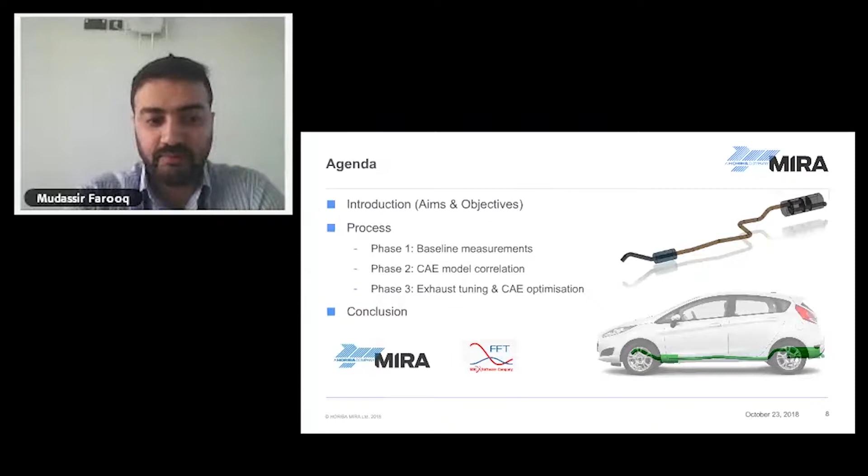Now I'm going to move on to the actual bit of the project that we did. So what is included in the presentation today? I'll go through the introduction, what aims and objectives we set for ourselves in the beginning of this project, how we broke it down into different phases. We've got 3 phases to go through, and then a conclusion at the end. Before I begin, this project was done in partnership with FFT, which is a subsidiary of MSC Software. They help us with the CAE side of things through their software, FFT Actran.

So, the aim. It was quite clear to us that we wanted to increase our vehicle development capability by conducting the sound quality development of the exhaust system at a CAE stage quite early on through subjectively developing it in the NVH simulator. A lot of the time we've seen in the past that development work happens at CAE stage where we cannot hear what the system sounds like. We do not have a subjective appreciation of the objective data. So this was the missing link, and this was the gap we were trying to fill. So we set ourselves some objectives.

So to name them, firstly, we needed to develop a procedure for ourselves for accurately measuring the source characteristics. So this means that for an exhaust system, the source will be the engine. So we had to identify the engine to capture its effects. The second step was to create a process for conducting a CAE analysis of the exhaust system. This is trying to identify the metrics to define an exhaust system in a CAE model.

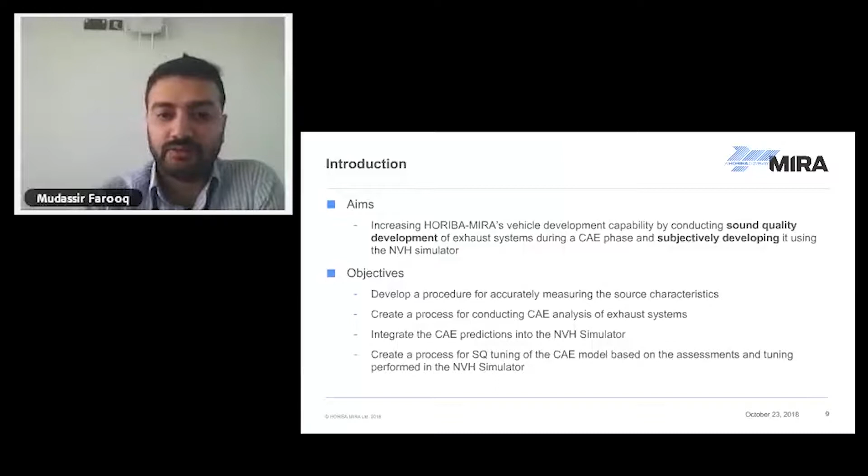Thirdly, to integrate that into our NVH simulator. I'll come to the NVH simulator a bit in detail later on. And then finally, to create a process for sound quality tuning of the exhaust CAE model through the simulator. So I'll go through each one of these in detail. Next slide.

Before I begin, I'll go through some of the theory. I wasn't sure on the audience that might get over here, so I'm going to go through the NVH theory over here a little bit. So what we have in all its simplicity is an engine that's producing some noise, which is connected to an exhaust system, and that is radiating noise into the atmosphere.

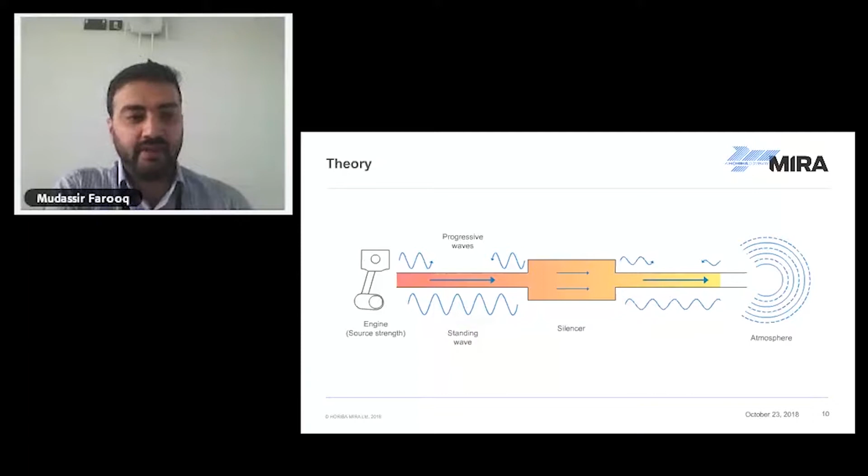So what we will get is forward traveling waves, so incident waves, and then they will bounce back because of the geometry and the impedance of the air, and then you will have reflected waves. As a result of these two, you'll get a standing wave, and this is what we are solving for in an exhaust system.

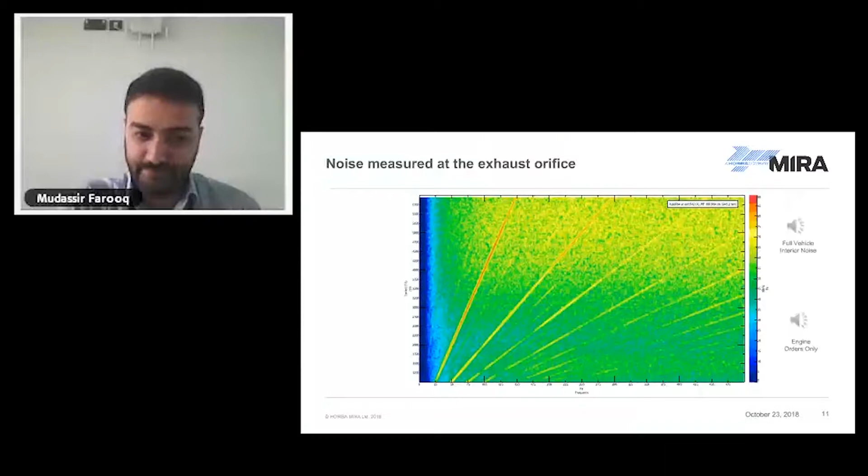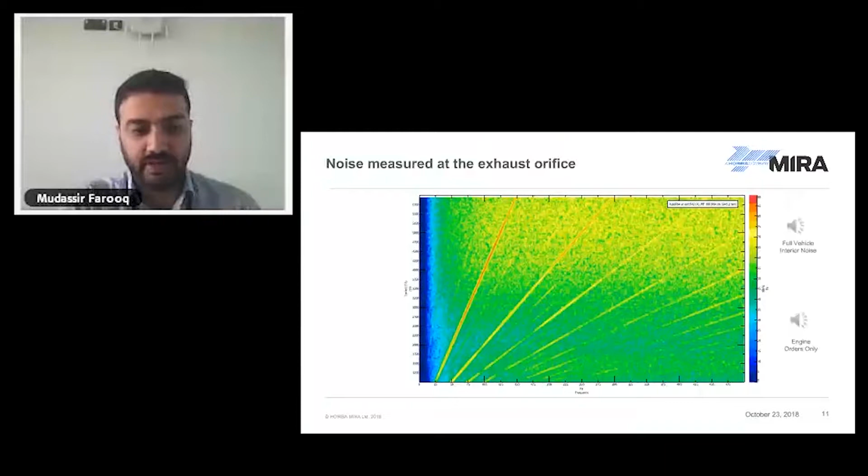As an example, I'm going to play back noise for full vehicle interior noise. So this includes road noise, wind noise, powertrain noise, and so that was a vehicle revving through the RPM range all the way from idle to max RPM, and you could hear the engine, you could hear the wind noise picking up towards the end, and you could hear the road noise. Now, if I was to filter out the powertrain noise, so these diagonal lines, it will sound like this.

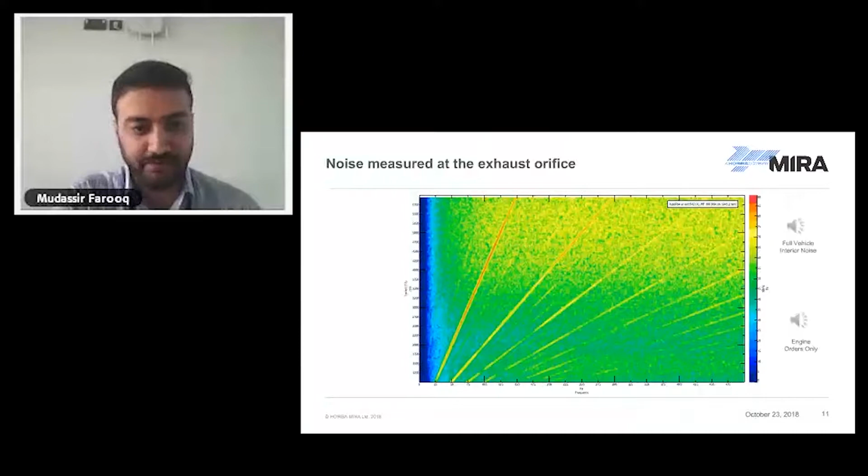So it's very tonal, very clear, distinct noise that you hear. So it gets rid of all the high frequency noise, the hushing noise from the wind and the road, rumble noise. So pure tones essentially. So that's what we're trying to tune over here, these orders. So moving on from there,

the noise simulator. So the noise simulator essentially is, we take some recordings on the track to create a model in this noise simulator, and then you can have a virtual model in a facility somewhere that you can replicate the load conditions, and it will reproduce the noise that we recorded. It's quite beneficial for target setting, for noise tuning, for development exercises, and for troubleshooting as well.

So what will happen in a hybrid vehicle, you'll start off, the engine is switched off, you will roll under the battery power, so you'll go up to 20 or 30 kph, and then the engine will kick in, but rather than accelerating, the engine might stay at a constant speed. So the subjective assessment of such a behavior, you can do it quite easily and clearly through a noise simulator. And that's one of the benefits of using a noise simulator.

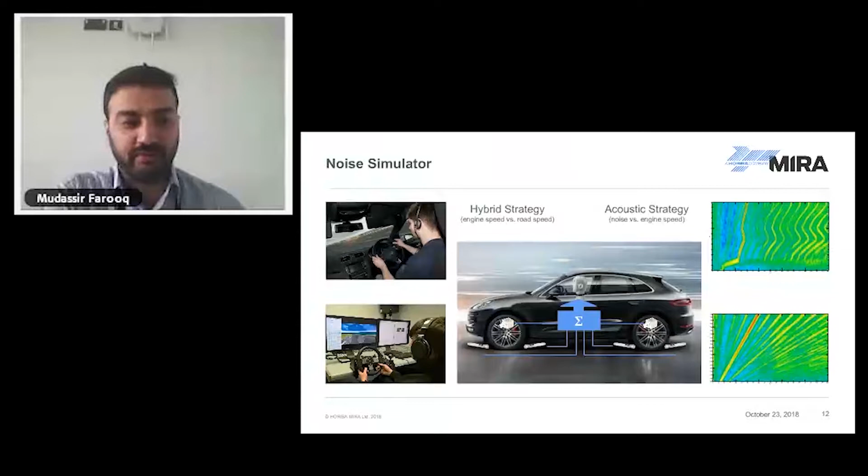In our instance, what we've used the noise simulator for is to tune the exhaust noise, to apply filters and to identify what we want from this. So I'll explain a bit more about the noise simulator later on through the project.

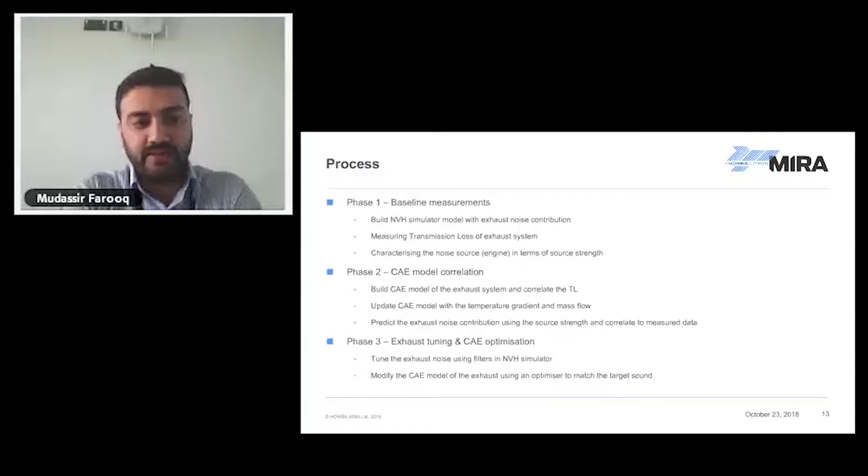So the three phases that we identified for the project. Phase one includes the baseline measurements where we take a snapshot of the vehicle. Phase two is to build a CAE model of that, and phase three is the tuning on the CAE model. So going through phase one, baseline measurements.

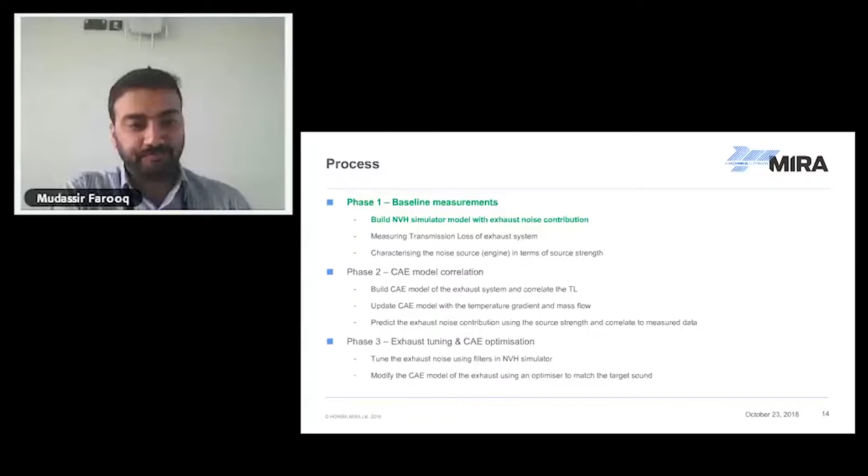So for this, we chose a Ford Fiesta 3-cylinder petrol engine, 1 liter EcoBoost, and to build, we started off taking vehicle level data. So this is measuring on the track, so we get the road noise and the wind noise, and then we measured in the dyno, so we got all the powertrain noise contributions, and to build an NVH simulator model, we need loads at different conditions, tests at different conditions.

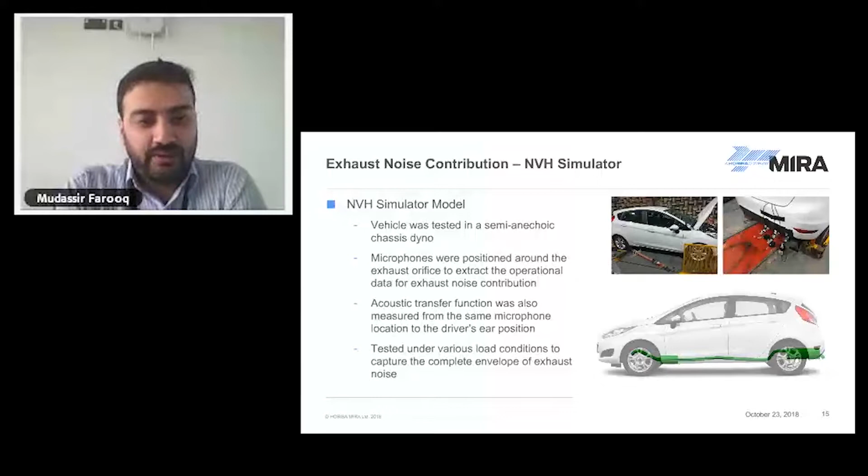So these are a finite number of conditions that when broken down and you put it back together, you make a simulated model of infinite conditions. So we started off with, like I said, the Fiesta, did the measurements and got our full vehicle data into the NVH simulator. So that's fairly basic stuff.

The next one was measuring the transmission loss of the exhaust system. Now, how to quantify an exhaust system? One of the metrics widely used in the industry is the transmission loss of an exhaust system. And the technique used here was a 4-microphone test method. So you've got 2 microphones before and 2 microphones after, and you test under 2 conditions, a normal termination and an anechoic termination, or as near anechoic as you can get it. And through the wave decomposition, you can work out what is your transmission loss.

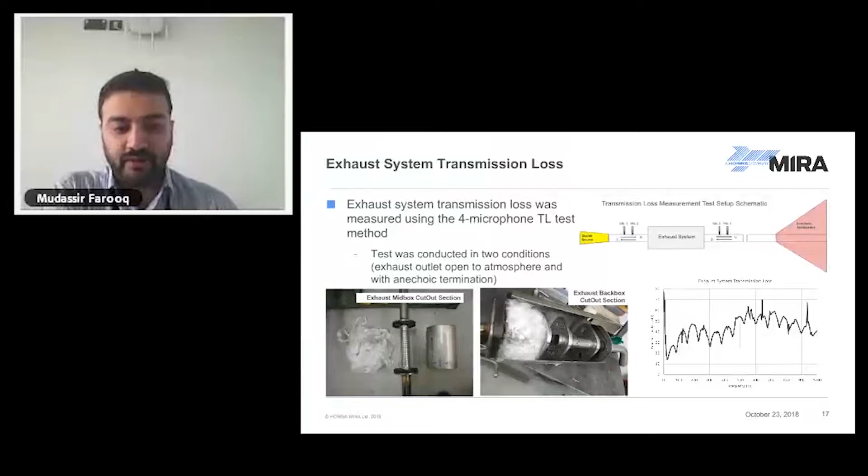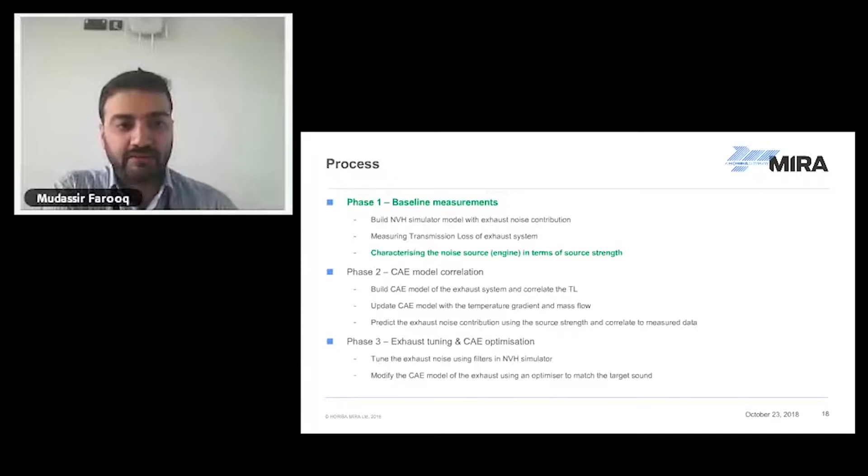So the test before this was to quantify a full vehicle. Now we did a component level test. And then finally, to get our baseline measurements complete, we needed to identify the engine noise source in terms of a source strength. So again, because we do not have the engine data, I was essentially treating the engine as a black box.

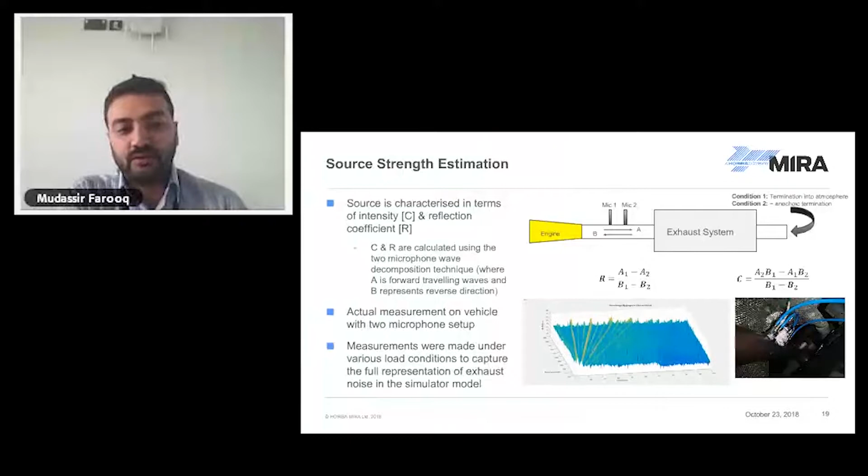The tests were done under various loading conditions. So to capture the engine noise accurately, we did the tests in different gears, under different throttle positions, and revving through the RPM range. So this animated color map here shows you the different load conditions measured. So the intensity of noise gets higher and higher with the higher load input.

So now at the end of phase 1, we have quantified our full vehicle interior noise through the simulator. We have got our component level noise through the transmission loss of the exhaust system, and we have identified our noise source. So that's all good. We've got a baseline set there.

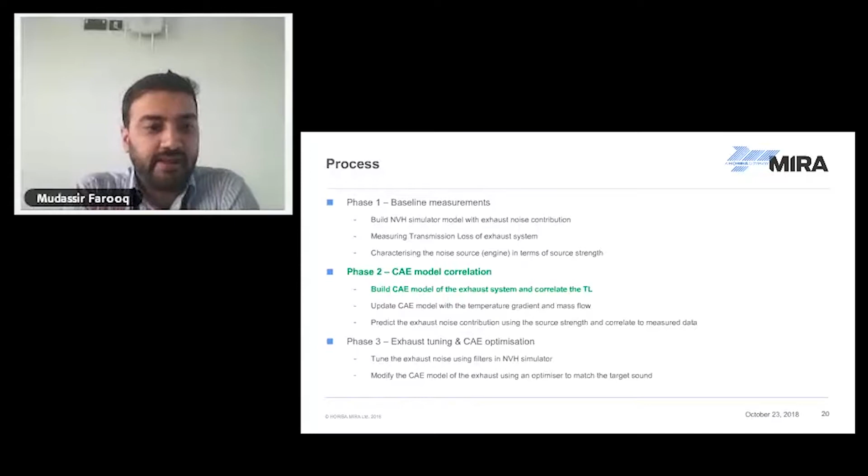The next step was to get this into the CAE world, to build a CAE model. The software package we chose for this was FFT Actran, as I mentioned earlier. So it's an acoustic solver, and what we analyzed over here was just the pure acoustic side of things. So this is not a vibroacoustic model at the minute. It doesn't include the shell radiated noise. We solely focused on the acoustically radiated noise here.

Reasons for going with FFT Actran were, I'll come a bit later to the detail, but it was because of its capability to deal with the changes in temperature. Because of an exhaust system, you've got a lot of changes in temperature as you're revving up through the RPM, and a change in temperature indicates a change in speed of sound, and that will change your noise predictions.

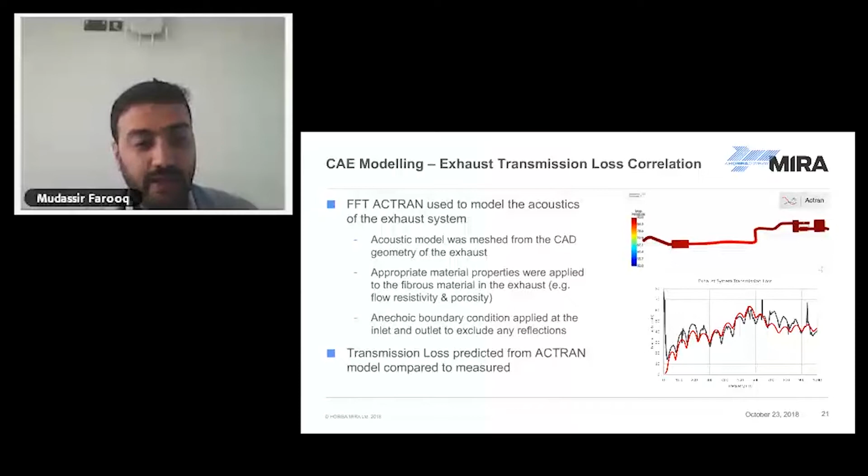So this is the exhaust correlation. This was done at cold conditions. So the test, the black line you see, was done at cold condition, and the CAE model representation is also in cold condition, which is room temperature. So I've got a CAE model of the exhaust. It correlates well with the measured data. The next step was to get the effects of temperature and mass flow in the CAE for our prediction.

So during our baseline measurements, we recorded the temperature and flow readings at these stations that you see on your pictures. So at 4 stations on the exhaust: one before the mid box, one after the mid box, one before the back box and one after the back box. The good thing about Actran over here is we would feed the exhaust at this temperature, and it will, through its inbuilt solver, disperse this flow and heat temperature to that exhaust model.

As you can imagine, we were testing for different load conditions, different gears, different throttle positions, and so for each one of them, it had to solve the temperature and flow analysis. So for instance, it would have to solve a single analysis for second gear 100% throttle at 4,000 RPM, and the next step it would do is another 500 RPM, so at 4,500 RPM and 5,000. So it will start all the way from 1,000 and go all the way to 6,000. So we had a few analyses to go through to get a full picture of the exhaust noise for different load conditions.

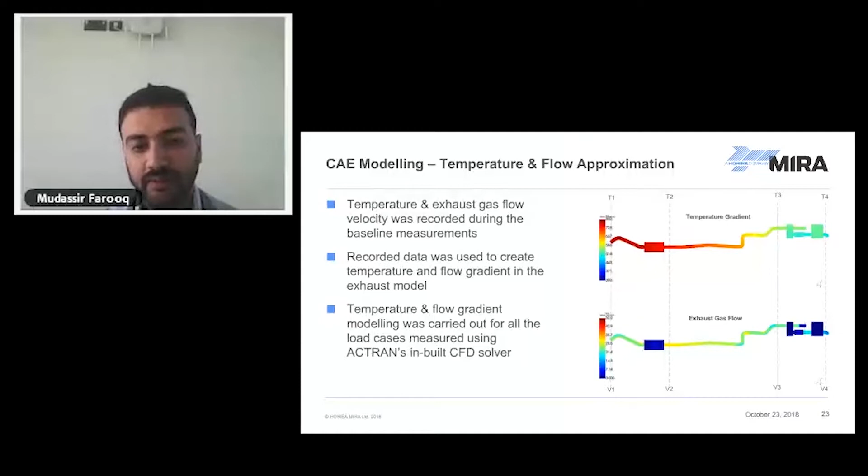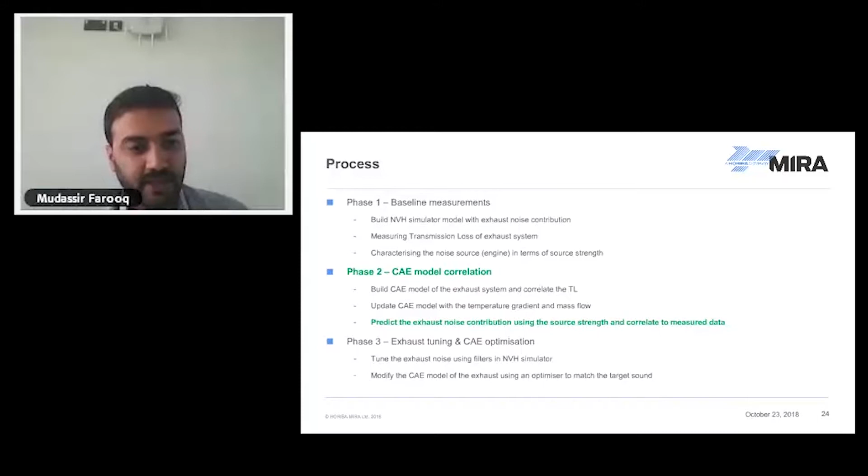So this is where it was coming in handy, where it was doing all of this analysis iteratively and then moving on to the actual acoustic solver as well. So the temperature and the flow results would be implemented on top of the acoustic mesh, and then it will be solved acoustically. So finally, to complete our CAE model correlation, we had to correlate the predicted noise at the exhaust orifice to the measured noise at the exhaust orifice, and also to do the prediction at the driver's ear position. So from Actran, we apply a unit load, and then we get a unit load output as a volume velocity at the exhaust orifice.

And if you look at the plot on the bottom right of the vehicle, you can see in the front the engine noise source. So we identified that through our baseline measurements. The exhaust we got in there in the CAE model, and we're predicting the exhaust orifice noise, which you see as a dot right at the bottom right hand corner. And we have measured the transfer function from the exhaust orifice to the driver's ear position. So I combine all my results. I use the source strength from the engine, I use the transfer function of the exhaust through CAE, and then I use the measured transfer function of the exhaust to the driver's ear position to predict my interior noise.

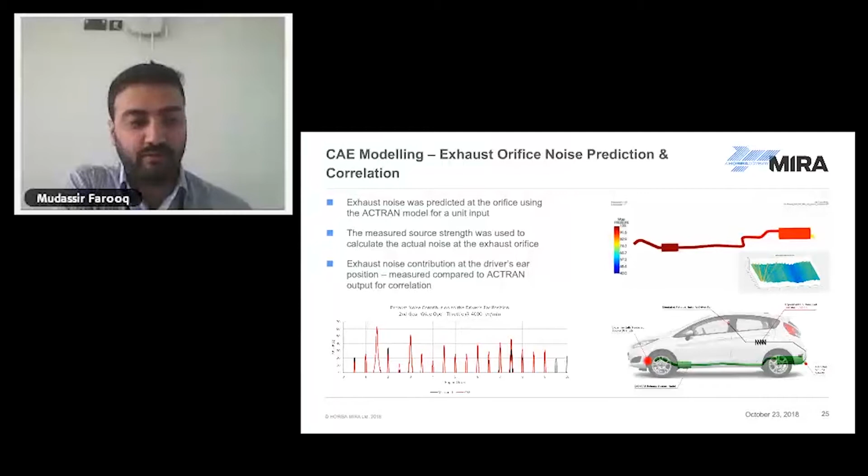And the plot on the bottom left, as you can see, is sound pressure level on the y-axis and the engine orders on the x-axis. The black line is the measured data and the red line is the CAE predicted data. This is exhaust noise contribution to the driver's ear position. And you can see that we have got good correlation. This plot is for a single load condition, but we've seen good correlation across the whole frequency band and different load conditions. Just for the purposes of this presentation, I'll just put this as an example here.

So we have now completed our transformation into a CAE model. So I've got baseline measurements and I've managed to transform it into a CAE model that correlates well with the measured data. So that's all good. Now I have my model in the virtual world. So what can we do with it right now?

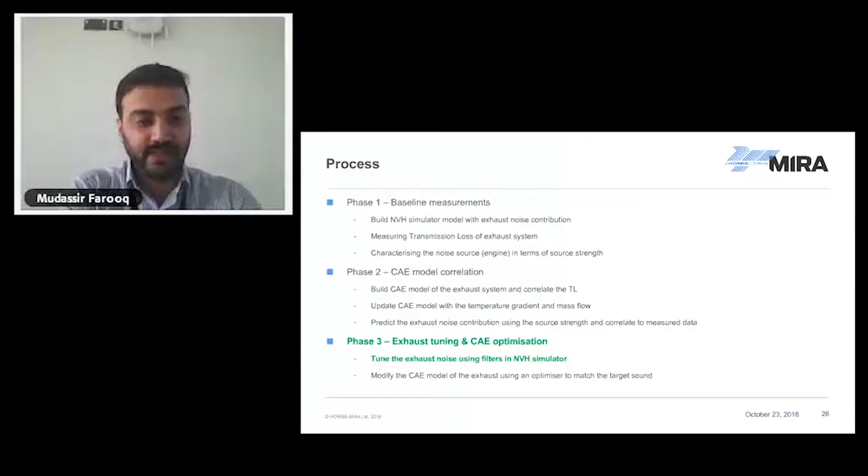Which brings us to the sound quality tuning aspect of this project, which is phase 3. So for the exhaust noise tuning, what we did was we went back to the NVH simulator and we isolated the exhaust noise contribution, and we started to play with the filters to see what sort of noise we want to hear.

So at this stage, we played the baseline exhaust noise and then we had some different filters applied on it. So each filter was to amplify a certain frequency or to attenuate another frequency. So we had a different combination in there, and this whole process went through a jury evaluation

where we had the NVH engineers sit down and assess each noise, and we finally homed in on a target noise that we said this is what we want to have from the exhaust noise. This is what we want to achieve after we've optimized it. So I'll play through the baseline exhaust noise first, and then the tuned one afterwards. So bear with me. So this first one is the baseline exhaust noise.

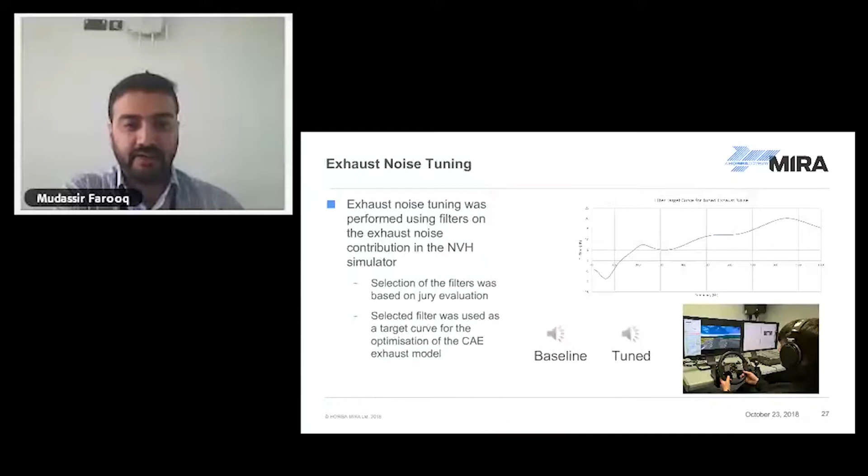Okay, and now I will play the tuned one. The difference is quite subtle, but there's more high frequency content in the tuned one compared to the baseline to give it more of a sporty feel. And the filter looks like this curve on the top right corner that you see. So we've boosted a few frequencies, we've dropped the lower frequency, and essentially this filter has become our target line.

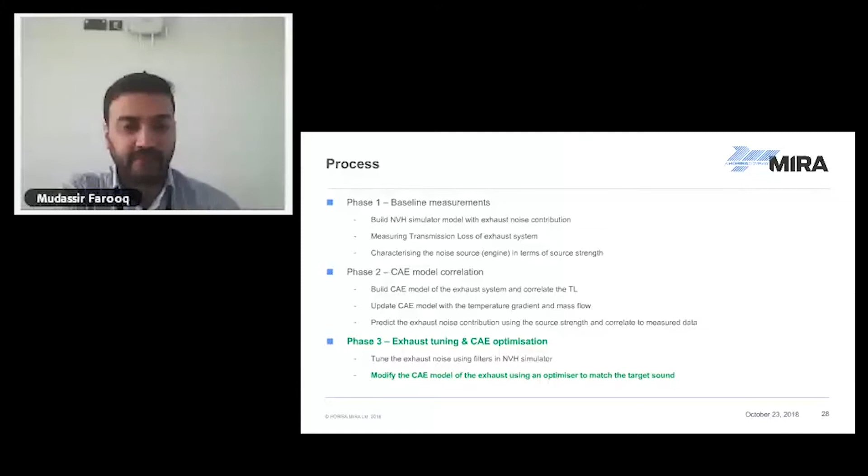One of these parameters was the baffle position in the back box, to move by about 10 centimeters. The other one was to change the size of the perforates on these baffles. And finally, it was the fibrous material properties, to pack it, to make it denser.

The reason we went with these variables was because we didn't want to change the packaging requirements. So we didn't want to change the volume because of the packaging constraints that might already be there. So this was to show what we can do with minimalistic changes on the exhaust system. Can we meet our target?

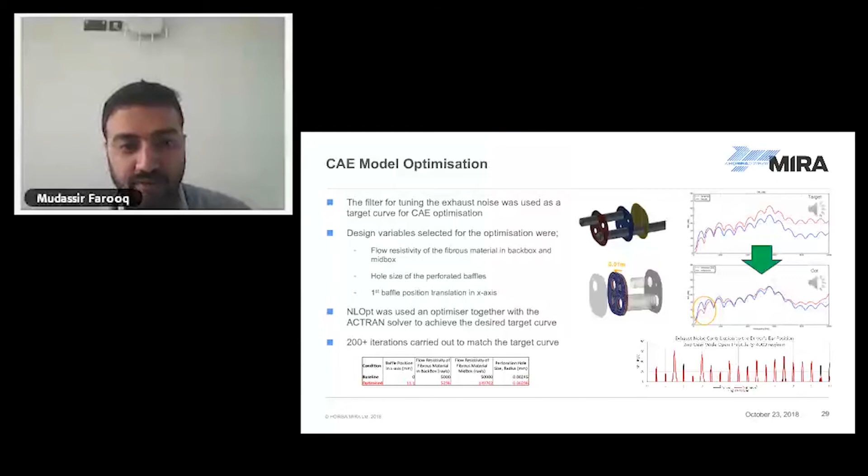Okay, then I'll go through the optimized version. So they both match, at least objectively. The plot you see down here, the black line is the tuned one, and the red one is the optimized. We have got good correlation at this stage as well. So all in all, we managed to meet our targets of the optimized or tuned noise that we wanted.

Coming back to our objectives, did we develop a procedure for getting our sound source characterized? Yes. For the engine, it was quite critical for us to home in on this procedure because not an OEM, as a consultancy, we work for different OEMs and get benchmark vehicles, and most of the data that we wouldn't have for engines, so getting GT Power or a WAVE model of the engine would be a bit difficult. For us to get it through measurements, that was a key part of this project.

The next step was to create a process for conducting the CAE analysis in the exhaust system. So we got our exhaust model in the CAE world, and we managed to correlate the transmission loss between the two, and also the predicted noise.

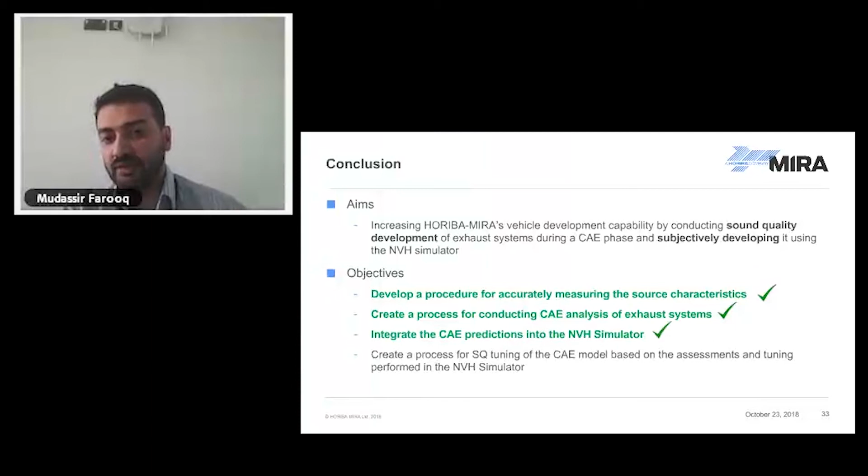Thirdly, we wanted to integrate our CAE predictions into the NVH simulators so we can play back the noise that we are generating through the CAE model. So it's no longer a line on a graph, we can subjectively tell the difference between the two and which one we prefer.

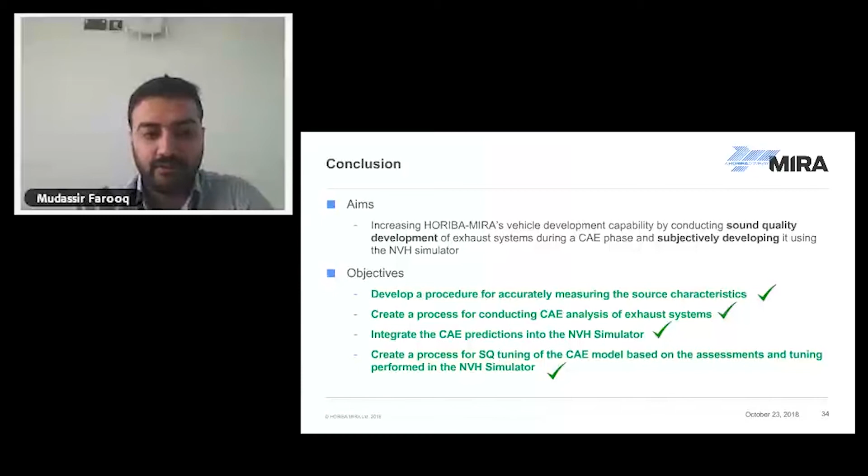And then finally we've got ourselves a process for sound quality tuning of the CAE model based on our subjective assessments, based on the jury evaluation, and then running it through the optimization loop of the software. So all in all, quite a successful project. That's it. Thank you very much for listening, everyone, and if you've got any questions, I will take them now.

You're just breaking up a bit - if I understood it properly, you were asking for the timeframe, right? Okay, so since this was a research project, it sort of takes a lower priority when paid work comes in. So it slightly took a longer time than anticipated, but we completed this in a year and a half.

Yes, there was quite a few hiccups in getting there in the first instance because we tried - so this you're seeing is the final version here, which everything works, but going through the process, we went through a lot of trial and error. We picked up on one method of measuring the engine noise for characterizing it, and it wasn't great, so we had to move on to this one. Similar with the exhaust modeling as well - we had to try a few different softwares at this stage. So this is the final product right now.